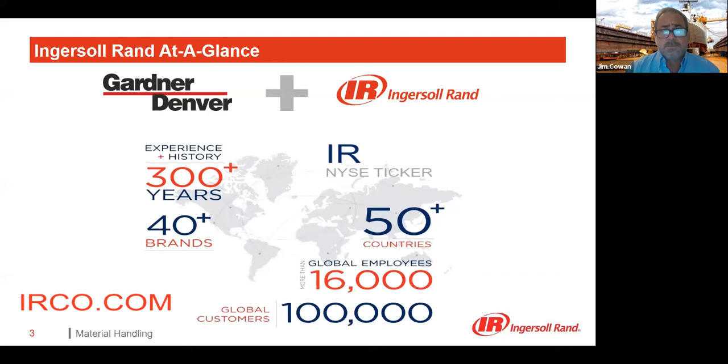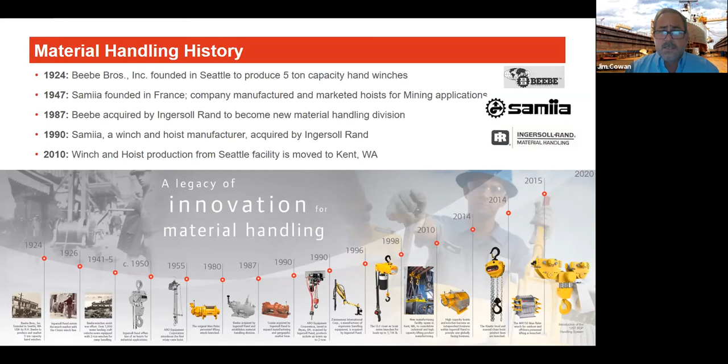This is a little history of the business unit as it stands now. It came together through a couple of acquisitions, the first being in 1987 with Beebe Brothers, a company out of Seattle, Washington, founded in 1924. Then Samiia, a company in Douai, France, which we acquired in 1990 and was founded back in 1947. In 2010, the facility in Seattle was moved just outside the city to Kent, Washington, to get more space.

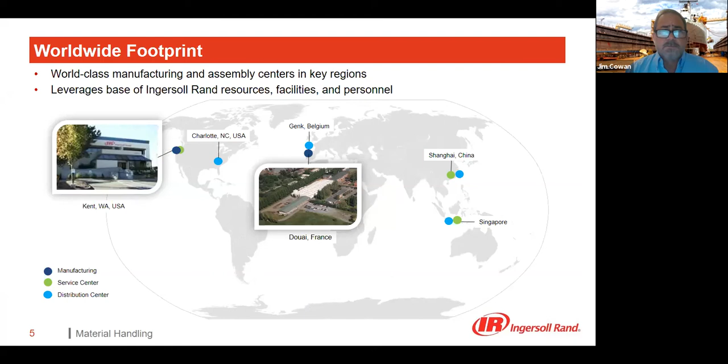This is basically our global footprint: the two plants I mentioned, the Kent, Washington plant and Douai, France. Both plants have service centers as well, and there are additional service centers in Shanghai, China, and Singapore, along with distribution centers. The primary distribution centers are in Charlotte, North Carolina, and Genk, Belgium, as well as in Shanghai and Singapore.

Thank you, Jim. So we're going to narrow down and focus on some of the lifting applications in shipyards—how hoists are mainly used in and around the water in building and repairing ships.

The biggest application is in shipbuilding, involving very heavy, bulky items such as rudders, shafts, props, and propellers. Most ships are built with major cranes overhead, but you can't get that crane or that hook up underneath the hull. So a lot of ships have welded pad eyes on them, and those pad eyes are used to attach chain hoists in order to assemble these big, heavy, bulky attachments or pieces of equipment.

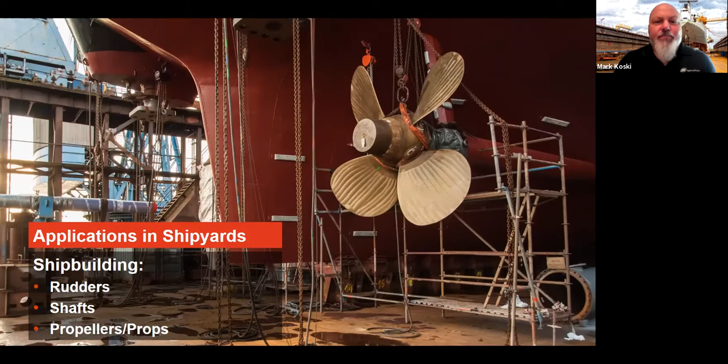In addition to shipbuilding, you have to pull and tension things to get them repaired—pulling props off, pulling rudders off. Most of the time those end up being damaged from being in the water, hitting things, or just regular use, so there's major corrosion. That's where these chain hoists get used a lot, for repairing the props, and for removing and installing azipods and some of the gearboxes.

As you're assembling these, that's where you see some of these overhead cranes used—but to pull generators, engines, or any major piece of equipment through the hull, that's where these hoists come in. In the modular sections, you have to assemble things not quite from overhead, so you have to pull these things from lateral positions, and that's where these hoists get used—another major application.

It's running a little slow.

When you get inside the ships, you've already built it and done some of the major stuff, but inside is where a lot of the hydraulic winches get used, even electric hoists and pneumatic hoists and winches. Again, a lot of marine salt environment, steam, high humidity, high temperature - nasty environments where you have to be very cautious, and that's where we thrive. That's where people think of Ingersoll Rand and these applications. In addition, there are mooring systems for pulling chains, anchors, and dock lines where heavy equipment gets used.

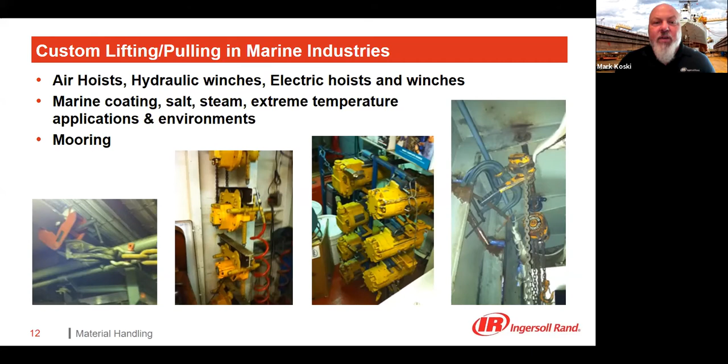You also have to think not only are you in the shipyard, but some of this equipment needs to be repaired offshore. That's this picture, when you have to take care of something while you're in the water - that's where a lot of people use air hoists and hydraulic hoists. And now we have a subsea option, which we'll touch on later. This just gives you photographs of how these things get used. The center one shows multiple hoists with welded pad eyes to reattach a rudder, and the one on the right is a 100-ton Hercu-Link series air hoist - that gives you a frame of reference of how large these things are next to a person.

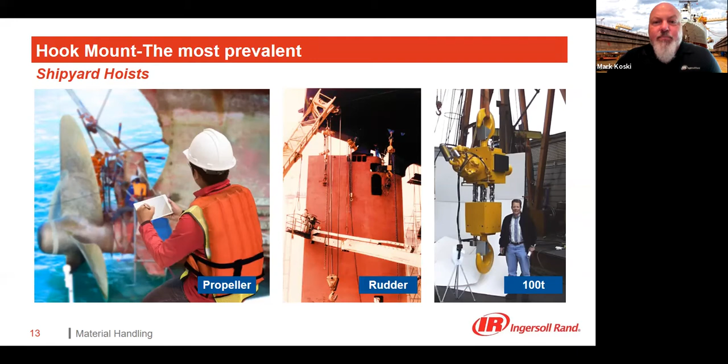And from there, I will turn it over to Mr. Jim.

Okay, so we're going to dive straight into hoists. We're not going to cover winches at all. I'll start with the power sources for our hoists: we have pneumatic, electric, and hydraulic. We actually have manual hoists as well, but we're not going to cover those. You'll notice in red lettering, the LiftChain and Hercu-Link - those are our main series of hoists. The LiftChains are manufactured at our Douai, France facility, and the Hercu-Links are manufactured at our Kent, Washington facility. The LiftChains are available in air and hydraulic, and the Hercu-Links have air and electric, so we have all three covered.

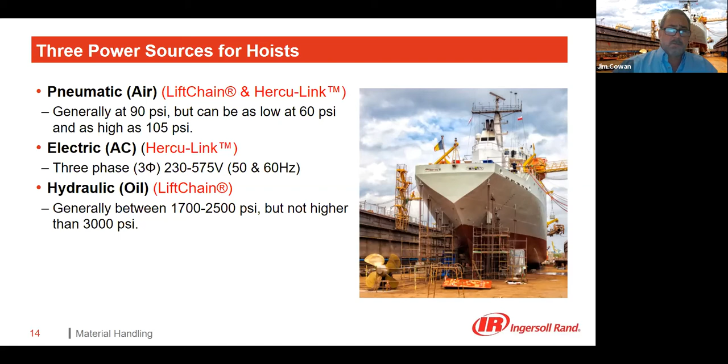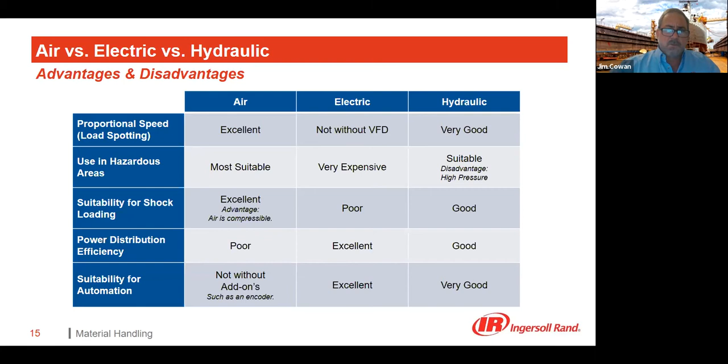Speaking of air, there are three different motor types available: piston, gear type motor, and vane motors. Piston motors are basically like a motor in your car - instead of gas, it's air, but you've got a piston that strokes a crankshaft for rotation. The positive side is they're really good for very high capacities and slow speeds, with a lot of control. The downside is there's a lot of moving parts and they get quite expensive.

The gear motor style covers by far the widest range, from 1 ton up to 50 tons, with the sweet spot being 1 to 25 tons. It still gives you a lot of good control, with a lot less moving parts and consequently a lot less cost. So we tend to sell probably 90% of that type into shipyards. And the vane type, we have those here but we're not going to talk about those today. We do offer a smaller capacity line of air hoists, which are also used in all of our air tools.

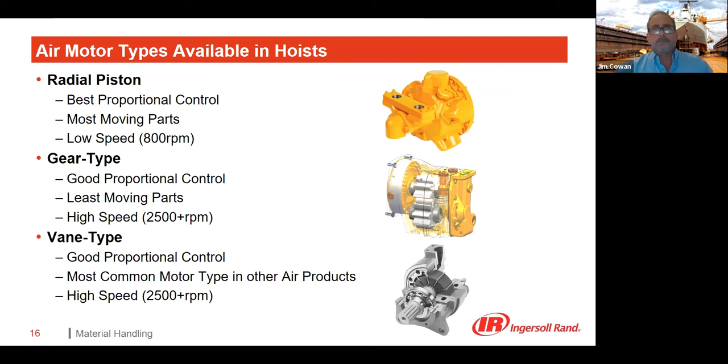So what's the best solution? I kind of gave it away - it's the Lift Chain gear motor hoist produced at our French facility, which is by and large the most popular for shipyards. As mentioned, it's also available in hydraulic, and there's a line developed specifically for underwater use, which he'll talk more about with hydraulic. On the Hercu-Link, you saw the picture of the big 100-ton - those are used in shipyards, few and far between, but tend to be high capacity applications. And then of course, electrics if those are needed as well.

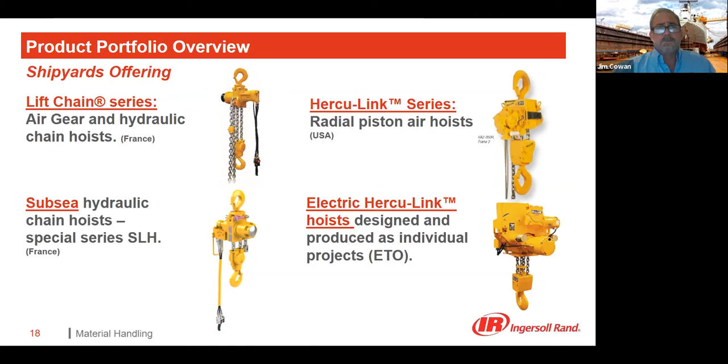Looking at just the lift chain air gear motor, if you're not familiar with that type of motor, most people are familiar with vane motors when it comes to air or piston. But the gear motor, the picture on the left is a great illustration of the internals. If you look at it, there's 2 rotors, and it's very simple. Air passes between the rotors, providing the rotation to the crankshaft or to the gearbox.

That's one of the horsepowers. We can actually double that horsepower essentially by just adding another stage of those same exact rotors, so same part number in between. I think the next slide I'll show you a little bit on that.

What I love about the lift chain is, especially the 25 and under, they're so modular. The design is so modular, and there's such few parts, gives you a great deal of flexibility. So a lot less parts, a lot less maintenance, less to stock. We can cover I think it's 10 different sizes, from 1 to 25 ton.

The 1 ton will give you, you can configure it to 2 ton by doubling the falls of chain. 1.5 to a 3 ton, as well as you can go to a 6 ton with 4 falls, and then our 4 ton, double it to 8 ton, on and on. I'm not going to keep going. And then we designate it with the S, D, T, and Q. So you can just look at the model number and know how many falls it is.

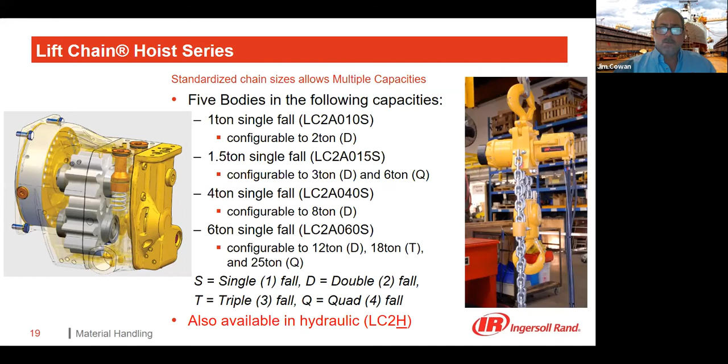There you go. So this is really to drive home the fact I mentioned, modularity and few parts. I mentioned there's basically just 2 horsepower motors, 3.5 and 5.5. And by adding, and you can see the picture there, it shows that extra stage added. So the picture before was just 1 stage, and this is the 5.5 horsepower version, which would cover, I think, about the second half, 4 to 8 ton and up to 25 ton. So just with 1 to 25 ton, just 2 motors.

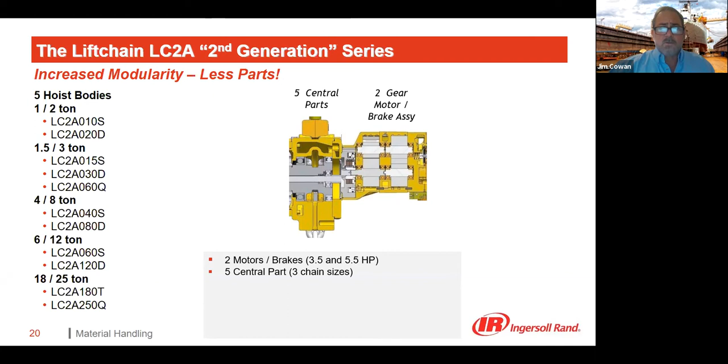You can go to the next slide. So the central body of the hoist is where the chain goes through. We cover all these sizes with just 5 parts, part numbers to order. And there's 3 chain sizes, 8 millimeter, 13, and 16.

Next slide. So this is the gearbox, and there's only 3 gearboxes needed for 1 through 25 ton. And just one muffler fits them all, by the way. It just screws on the end.

So go ahead and next slide. And only 1 motor cover fits all the motors, or both motors, I should say. And then go ahead, the pendant module, just 1 part for that, 1 part for the pendant. Next slide. And go ahead and go to the next slide.

So the big takeaway here is just, if you need a pull chain module, those as well. And actually at shipyards, Mark, you'd agree, pull chains are probably for longer lifts, you start to see more and more of those.

Yep. And then it shows where you can just unbolt the pendant module and bolt on the pull chain module. So anyway, that kind of shows you a nice breakdown cutaway of the hoist. The big takeaway is fewer parts, fewer costs, less maintenance. Go to the next slide.

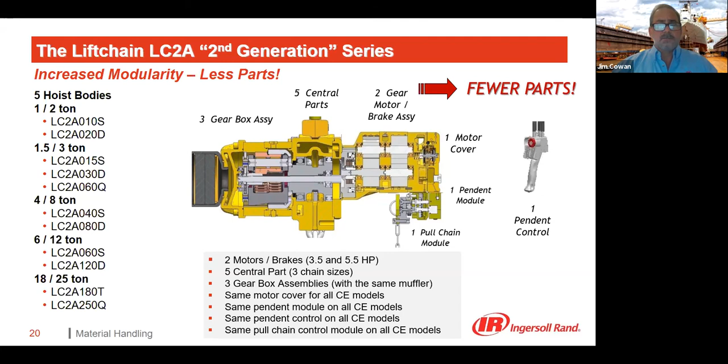So beyond that, some of the other features that I really like are all really catered more towards safety. Our overload protection device is standard in all of our CE models. It's offered as an option for our non-CE models. And obviously it protects the hoist, the hook, all the load bearing components from the operator lifting too much weight more than the rated load.

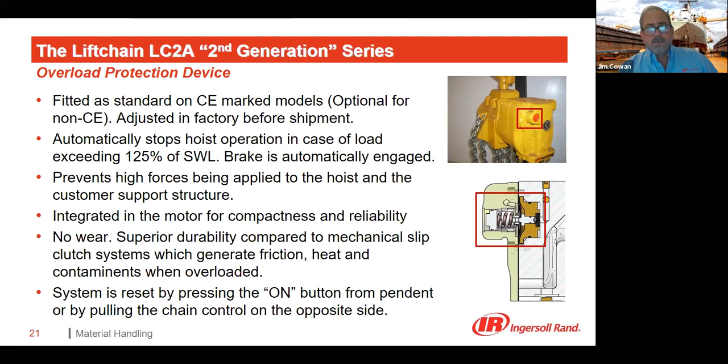So it's a good feature, I always recommend it. But what's unique about ours is that there's no mechanical slip clutch. Everything is pneumatic. It'll sense the difference in the air pressure and it shuts the hoist off completely. So there's no friction, heat, so no wear and tear. Next slide.

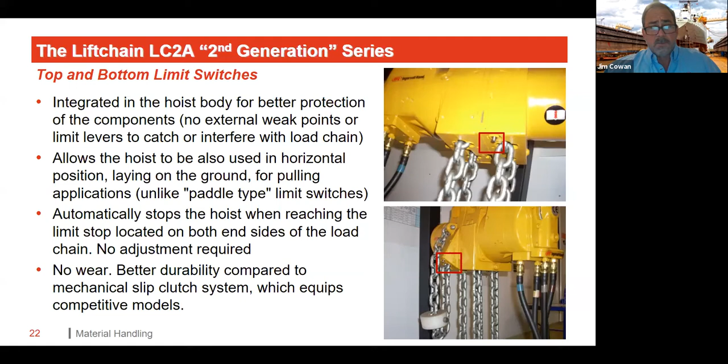And just like the overload, it's pneumatic, it shuts the hoist off, it doesn't slip. So again, no mechanical wear and tear. Next slide.

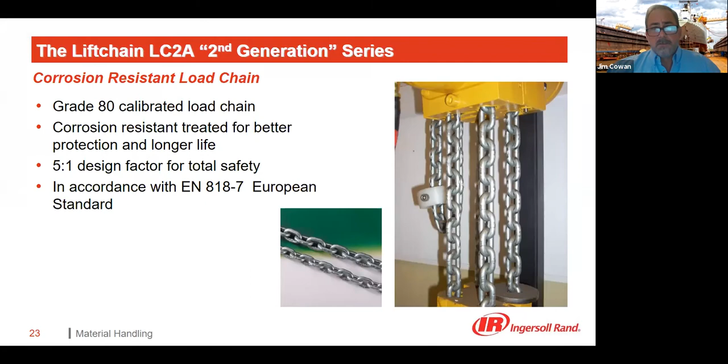The load chain is all grade 80 load chain. It's zinc plated for obviously shipyards, on the water or near salt water, corrosive environments. All built with a 5-to-1 design factor, and they're built in Europe, so they meet all the European standards and codes. Next slide, we got a couple more.

I mentioned the muffler earlier. It's just one muffler for all the 25-ton and down, just screws right onto the end of the gearbox. But I say it's a safety feature because this is a very quiet hoist, relatively. It's only 79 decibels.

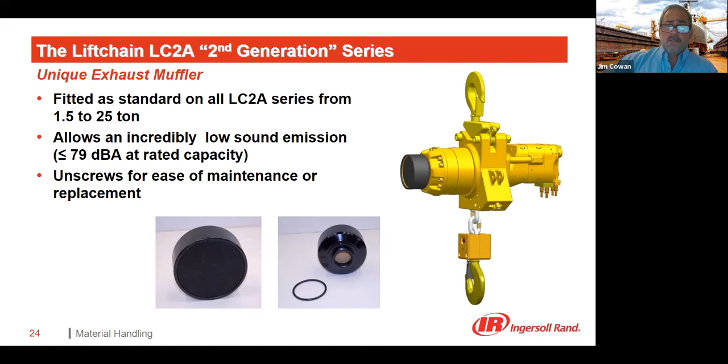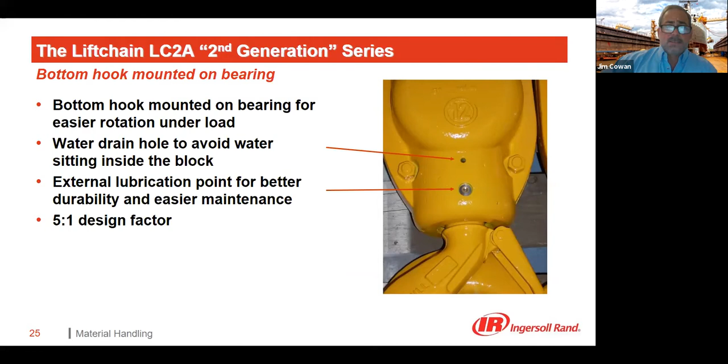And I think it's the last slide. I'll turn it over to Mark. This just shows a picture of the bottom block. Water collects on the chain, runs down to the bottom block, collects - just shows that there's a hole to drain the water. You also have a lubrication point, and again a 5-to-1 design factor as well, and a bearing for easy rotation. And that's it in a nutshell. There's a whole lot more, but for time's sake, I'll turn it over to Mark.

All right, thank you, Jim. So as you can see, we haven't just haphazardly built this. Every part of this hoist has been designed with the customer and a lot of shipyards in mind. So all the nuisance problems where a lot of competitive hoists out there have problems, the Liftchain takes care of those problems and makes it much easier.

But just because it's a standard product doesn't mean we will not build engineered to order. We call them ETO. So if you want something custom, that's where Ingersoll Rand shines. We will build very customized individual components or completely new hoists. In fact, that's how the Subsea originally started. If you want an electric chain hoist that's explosion proof, ultra compact, we can do that - customized mounted special end trucks for air, and even radio remote explosion proof control systems. Again, the answer is yes.

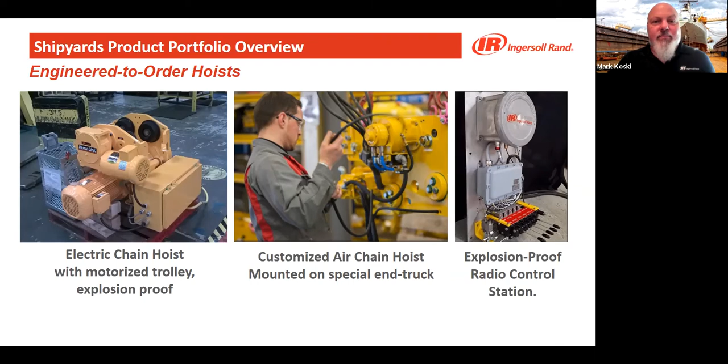The paddles on the pendant are extra wide to accommodate a diver's glove. All the control lines, all the main hydraulic supply and return lines, everything has quick connects, both top and bottom ends. So again, everything's been designed around underwater use, and now that's available as a standard offering for commercial applications. Okay, the next one.

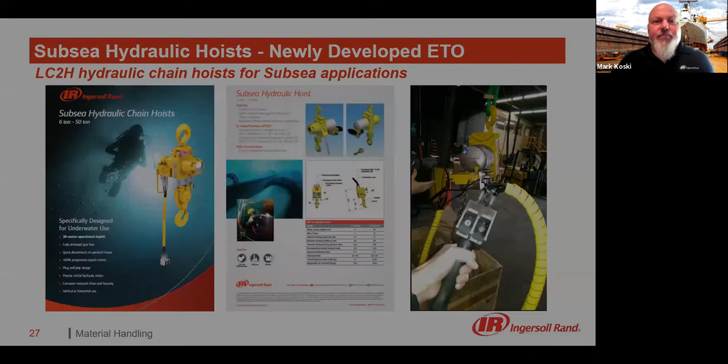So the other thing we want to bring home is instead of just calling Jim or I or one of our distributors globally, we want to find out, number one, what is the application? So if it's lifting or pulling, safety factors change. Just a reminder, anything above 0 degrees is considered lifting. So a way of thinking about it is if you move the load and then something cuts the chain or the wire rope, is that load going to move? If the answer is yes, then it's a lifting application. That has to adhere to the 5-to-1 safety factor.

But some of the other questions we're definitely going to be asking is, what kind of power source do you want? We build all 3 different types, so what's going to be the best for that application? What is the capacity requirement? What's the speed? Is sensitive speed control required or simple on-off? What's the working length of that rope or chain? Sometimes people think I'll just get that long of a chain - no, it depends on the number of strands on the hoist.

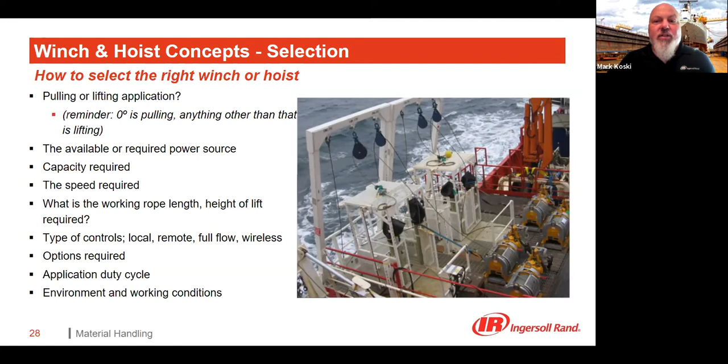What kind of controls do you want? Pull chain, pendant control, full flow, wireless, radio remote, any other options, and duty cycle. And then last but not least is what's the environment and working conditions. So again, shipyard, especially offshore, you get some very harsh conditions, and that's where Ingersoll Rand thrives. So, things to consider.

So we've gone through the highlights mostly on the hoist. There's a lot of other applications that we handle, and here's a couple other sources. If you go to ingersollrand.com, you can navigate and click on material handling, lifting. We have many custom lifting application solutions, some white papers, case studies. If you go to the Marine News magazine from last year, there's a major article specifically on shipyards. So there's the link there.